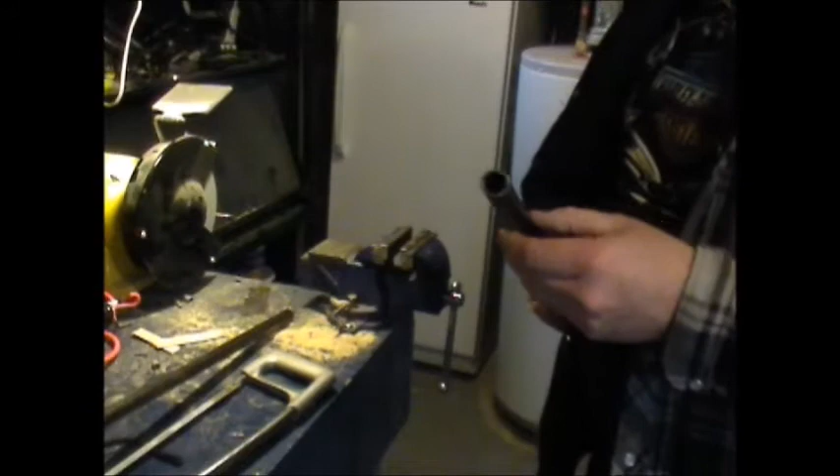Still as crooked as a politician. Someday I'll cut it straight. I guess maybe if I get a half decent saw. I have to pick one of those up.

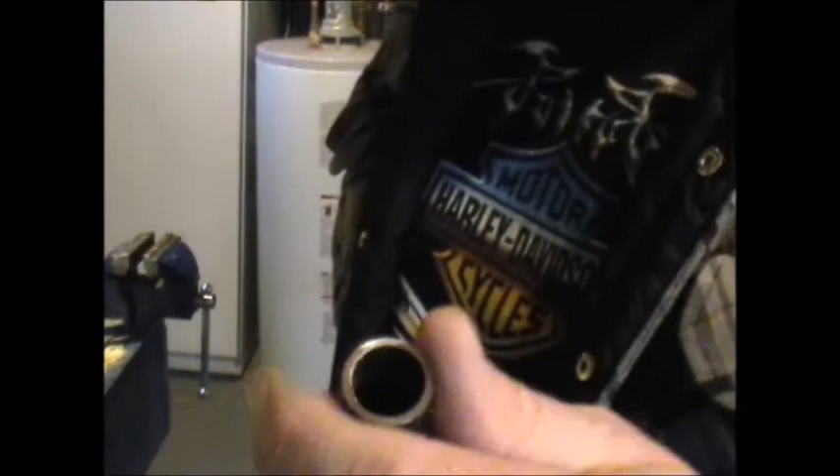There, just dressed it up a little with the belt sander. It's got the disc on the side. It's as square as an English professor now.

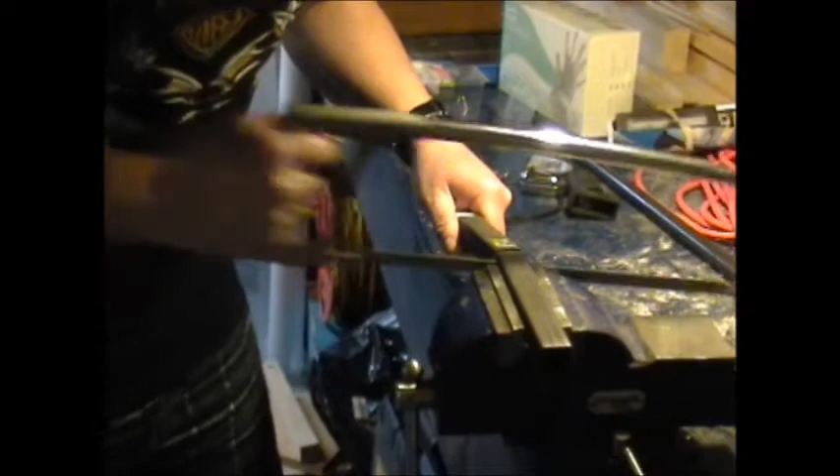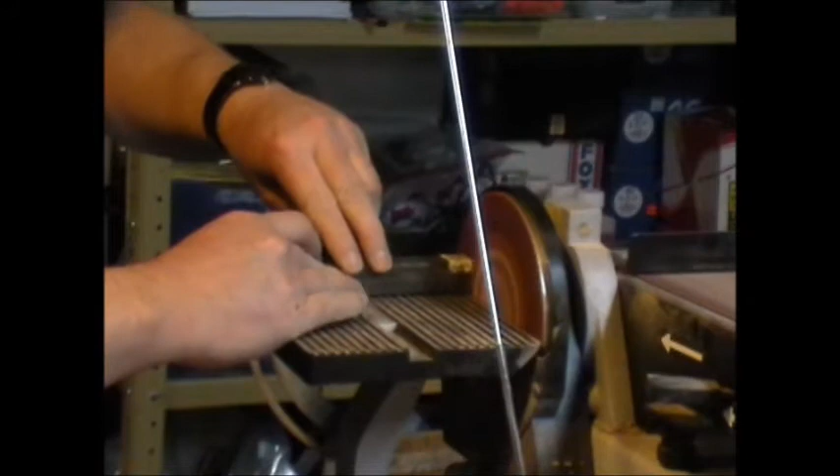See how crooked I can cut this one now. A little better. There.

Nice and square. And if you're doing anything like this, especially on a wooden bench, make sure you stick around for half an hour so you don't have anything getting lit off there.

And gear leg number 2.

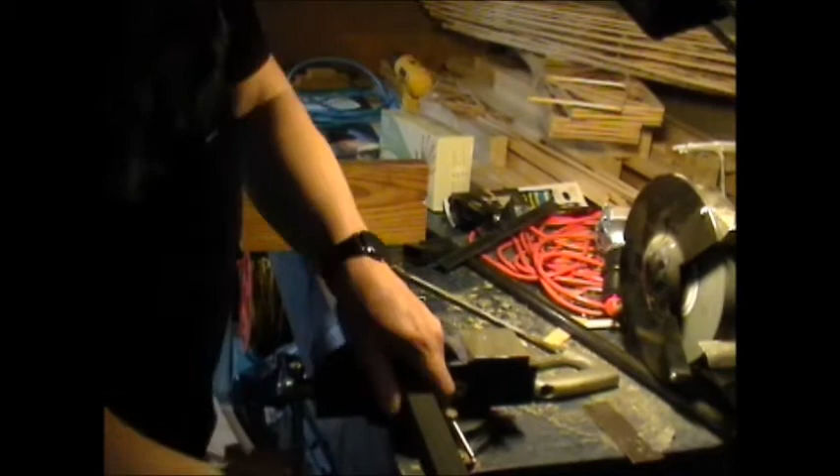There's nice little burrs on the inside. I just used the back of an X-Acto knife to get in there. Done, all gone, no finger cutting.

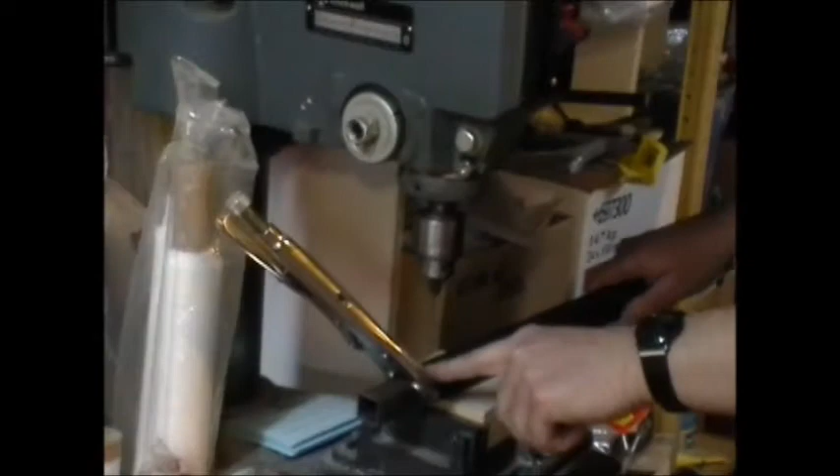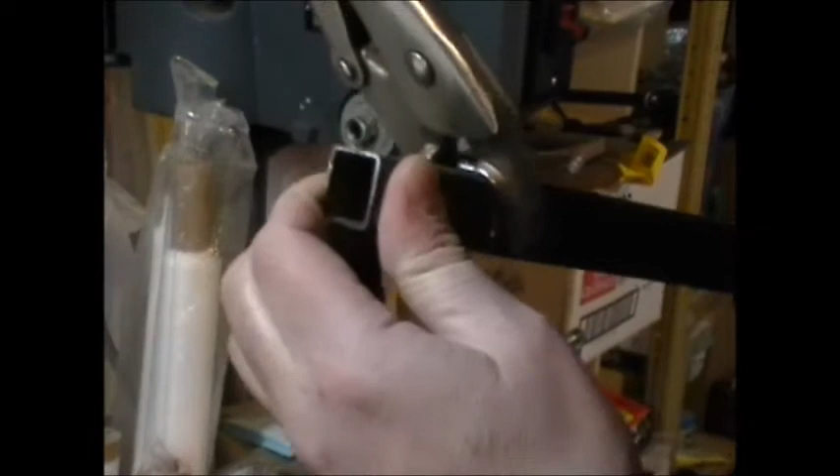Okay, I put a Vise-Grip on there. I get the inner tube slid inside, and I just clamped this just enough to keep that from moving, because I want to drill the two holes I'm going to use for the bolts here with this in place, so that way it'll be perfect. Don't want any alignment problems to deal with.

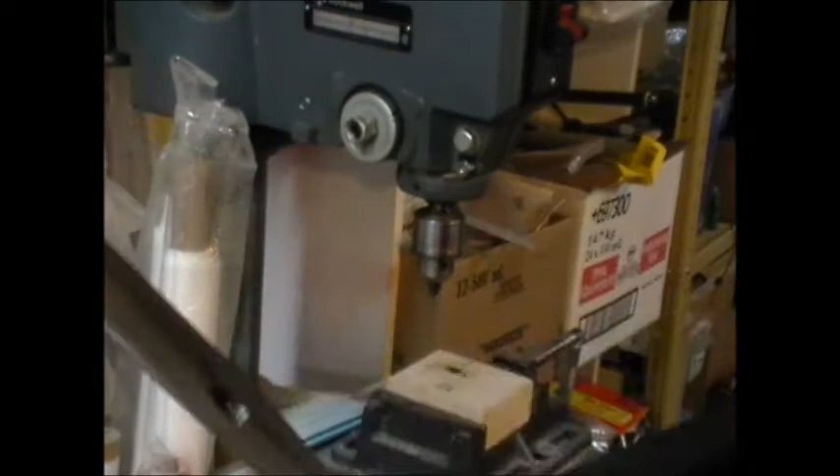Done like dinner. And what I did on the other side, you can see the oil stains there. I squirted some oil inside, which I really couldn't do on the other one, tried to get it on the bit for the first drill, but that's it.

Just getting the burrs off. The drill bit that's too big, just enough to get that sharp edge off. Okay, for now, because they're much easier to get in and out, I'll just use these cheapies to hold this thing together and carry on with the axle and stuff now.

Okay, there's the layout for the landing gear. We got a center line marked here, a drill line here, used a square, I got mine over there, put a 90 degree, ran another one here, marked the center of the axle, and determined how far this has to be from the belly of the airplane.

So I came up with 44 inches. This is going to give me 47 inches. That's 15 inches from the center here to the inside of this U-channel, for a 20-inch wheel. Half of that, of course, is 10 inches.

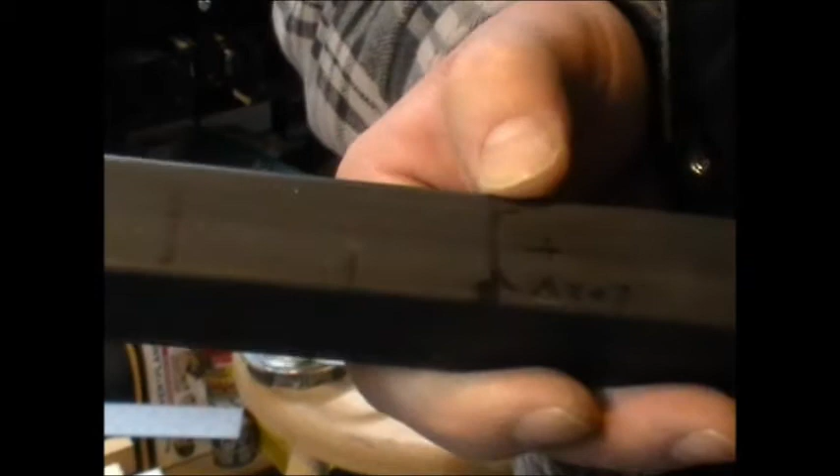Measured where I want the axle to stop. It's about here. I'm probably going to cut this much off. So that's my 20 inches.

Marked this off, moved up to the center where the axle will be. I'll just start drilling my hole here. Of course, it's going to be 3/4 of an inch, and I measured up 3 inches, and that'll give me 3 inches center to center, and of travel on the suspension, that should be enough.

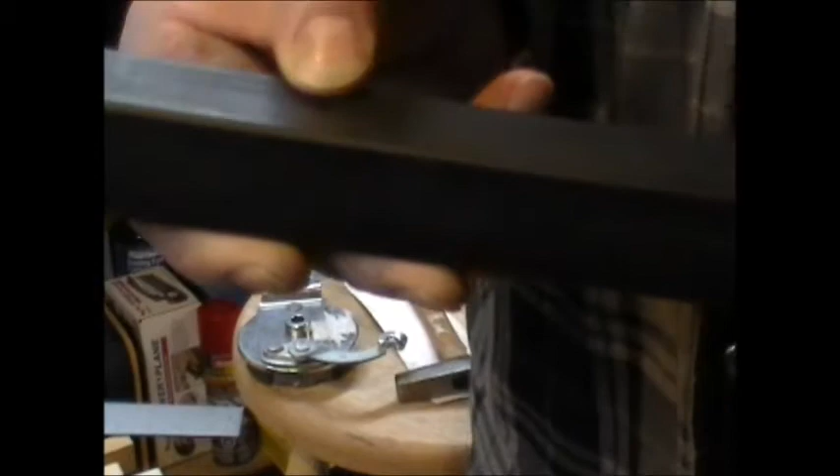There's nothing in the plans that tells me how far to go with this, so bungee suspension, I think that should be plenty. So I'll just mark off the center punch. I know I brought one down here.

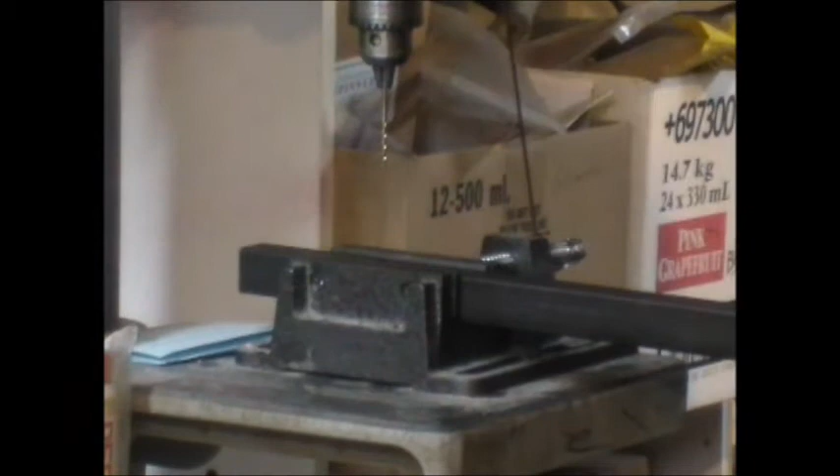Tried to get some cutting oil today, and the guy says, 'Oh, we can have some for you in 2 weeks.' Yeah, I'll just wait for that.

If you ever do decide to build a wooden airplane, I haven't made the mistake, because I've learned from model airplanes, you're messing around metal parts and you're using oil and stuff like that, don't put this near your, or lay it on your plane with bare wood. Oil and wood, you're going to have trouble getting stuff like varnish to stick after you make that groaner.

But anyway, there's 2 holes here, the other 2 holes. So now all I got to do is cut these sections out, and then my axle will be able to slide up and down that with the bungees wrapped around them.

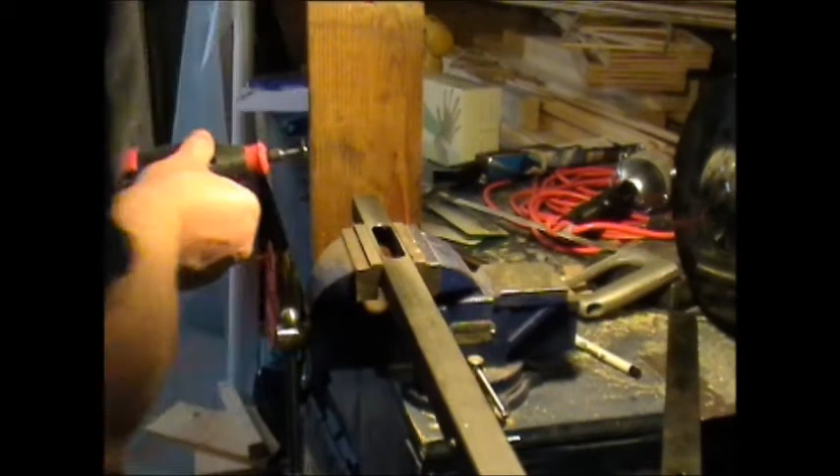You're probably wondering why am I using this little tool to cut this steel. Well, for one thing, it's only 0.049 thickness. And the other thing is I got a lot better control over that little tiny disc cutting that line than I would with one of the bigger cutting discs that would fit on the air tool I have in the garage.

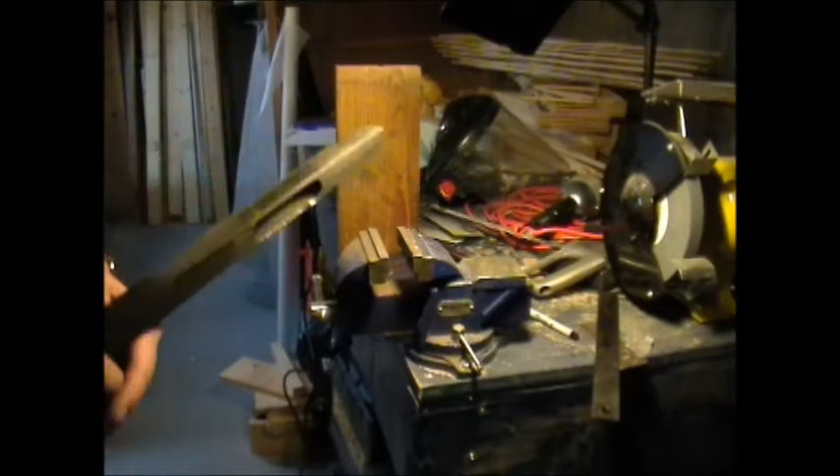So for a fine job, I'm using a fine disc. And of course, I'm using the face shield. Had a couple of those little discs explode on me, of course. Any wrong move and the thing will grenade on you. But there it is.

Put some light on this. And you might be able to see there, she's an offset. Let's go see if the axle will fit. You know, I got to do a little filing and tidying up, but you can see how that works. It fits in the slot there pretty slick.

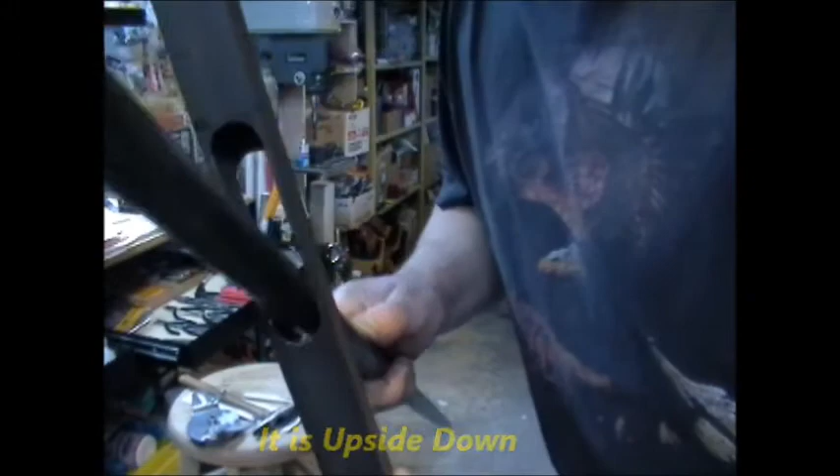What I'll be doing next would be a bolt in here with a tube, steel tube spacer, and a bungee of one loop that goes in the spacer here. This will actually be more like a pin. Try to get that in view. Need 3 hands here. It'll wrap around here, wrap around the other one on the bottom, and then you just kind of do a figure 8 a few times, and that's your suspension.

That's how early airplanes are done. And that'll just dance up and down in there. Should work slicker than a snot in a rooster's beak. It'll work with the file later, gets everything nice and straight. Now the axle slides up and down this perfectly.

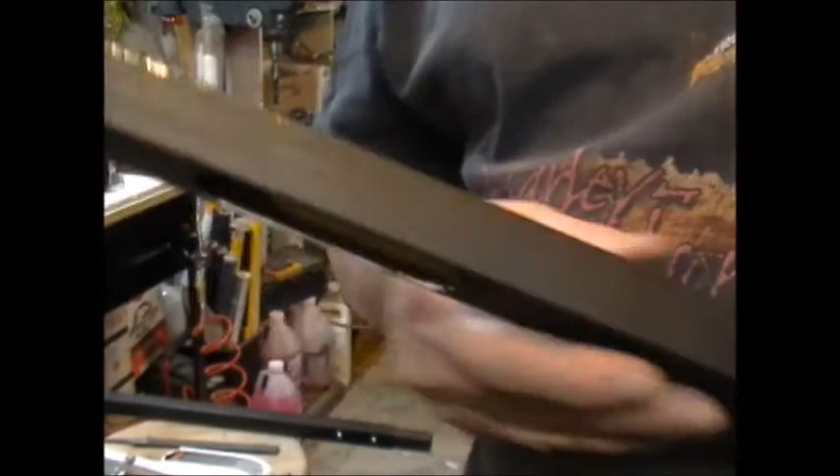Okay, that's one down. Time to get another one. So there's the first steps anyway, pretty much completed. As you can see, she's going to be about 40 inches from here to here.

So what I got to do now is make up the spreader bars. They'll bolt on here, and there'll be 3/4 inch aluminum tube, I believe, with the end compressed or flattened. That'll be my next skill to learn. And that'll bolt here, and there'll be a spacer, and then a big washer, actually 2. Spacer, washer, head of the bolt, same on the other side with the nut. And that's what's going to hold your spreader bar in place and the bungee in place.

So all I got left to do for now is just drill this hole here, and then it'll go through here, of course, and that'll hold the upper end of the legs in place. And then on the top I'll nip this out, and that'll allow my wing strut to come in and bolt here. An option is to run a 4130 steel strap across

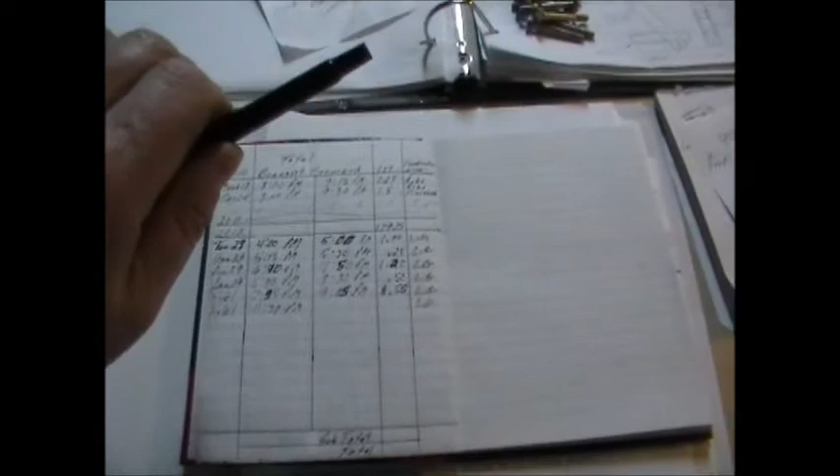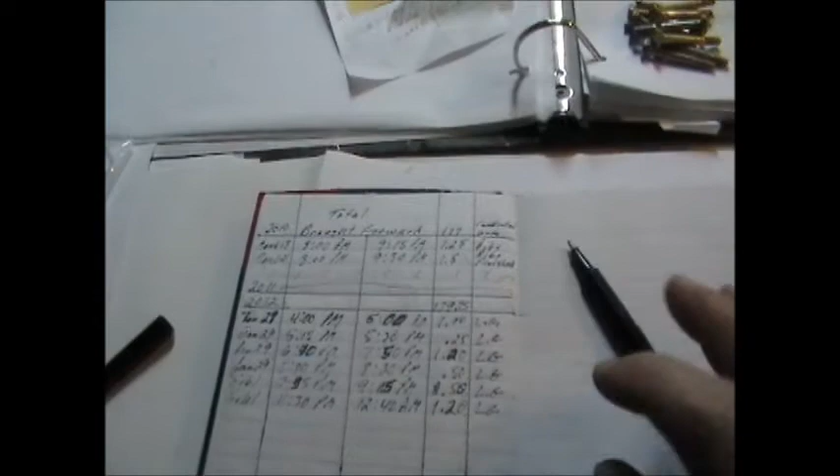Yep, there she is. Go take a look, see how much time I actually spent on the landing gear to get that far. That's... say about almost just under 5 hours to get that much done. Lots of cutting and drilling, so that's not too bad. Probably got another 5 hours to go before it's done, because like I said, I got

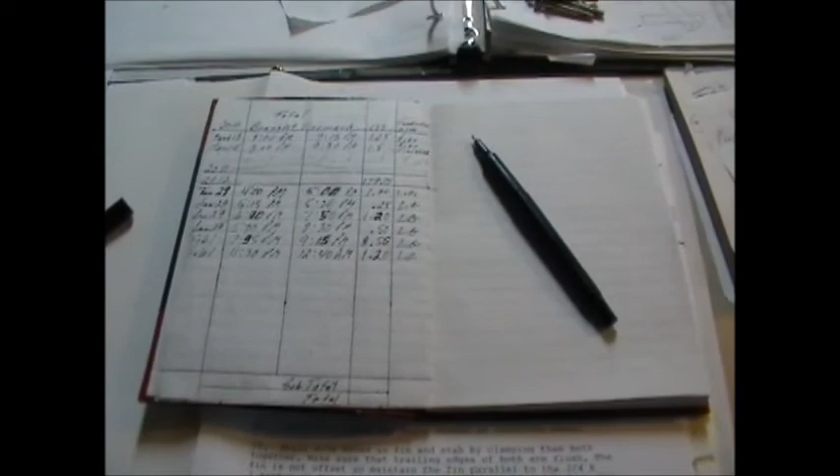these are the bolts I will be using, good AN bolts. Once everything's sorted out.

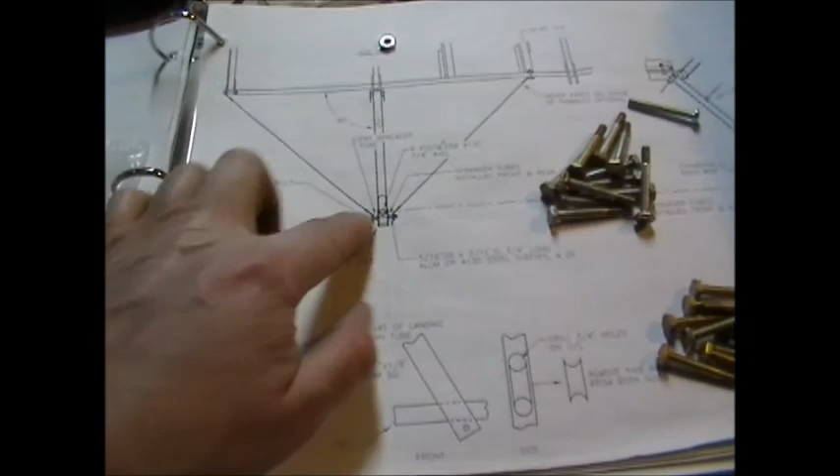So we got the gear leg done. As you can see, the cables going fore and aft. This is a side view, of course, and then front view. Pretty much see how it sits on the floor there. Of course, you got a cable.

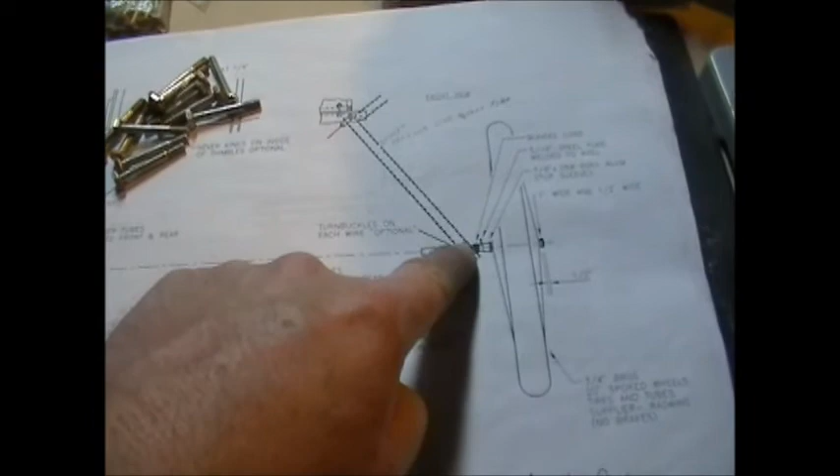This one be going forward or aft, and then oh no, that's actually your cross. These two here, and that one would be going fore and aft. So it's like an X brace wires, a front set and a rear set. So see why I spent over $500 on turnbuckles.

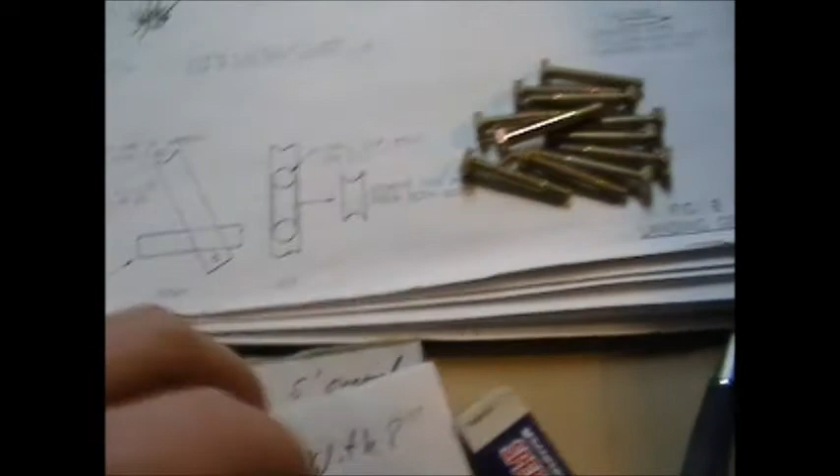And there's that slot. So, and then there's the bolt they're talking about and everything attaches to. And there's the spreader tube and that little arrangement there. So about halfway there, I guess.

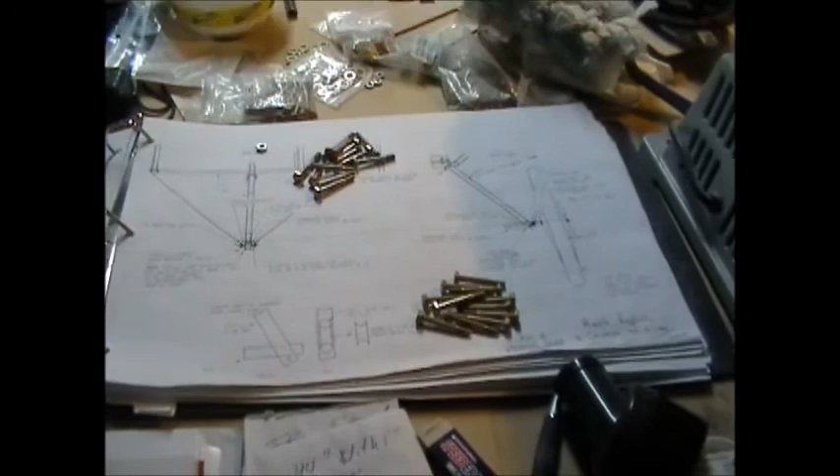Problem is, it's going to take another 2 weeks to get my turnbuckle. So once I reach a dead end with this, I'll start building the tail feathers.

Yep, it's getting there. It feels good to be working on it again. Of course, here's one of the wheels. Yep, that's what they had in those days. I think it was 1927. The original Heath was designed. Yep.